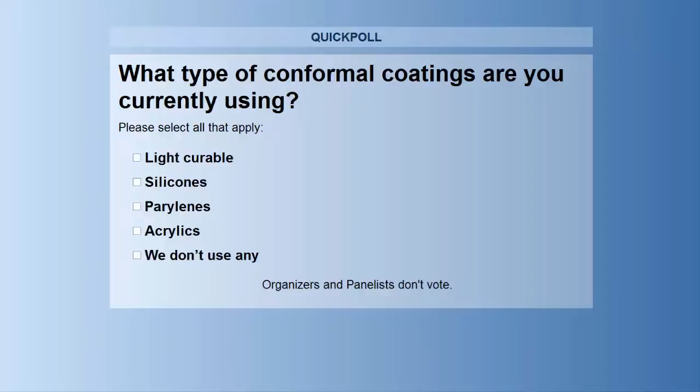All right, looks like 42% weighing in with light curable, 44% silicones, 25% parylenes, 53% acrylics, and 14% not currently using any. So certainly appreciate your weighing in on that. I know that this information will be very helpful to our presenters as they work through their presentations today. So thanks again for participating.

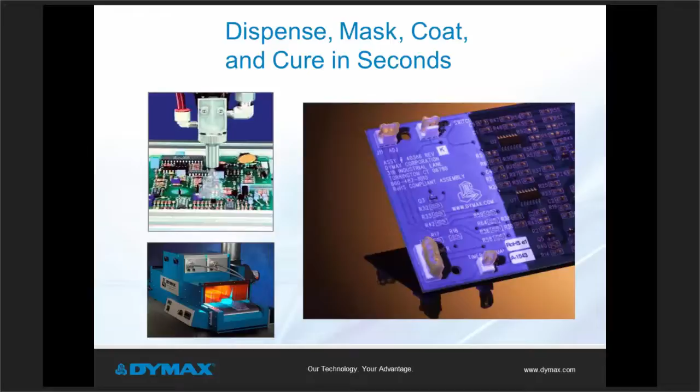Now, Chris, before we jump right in and start the discussion on UV light curable conformal coatings, perhaps we can take a step back and look at how UV technology works in general. Sure, absolutely, Laurie, thanks. And here, the typical UV curing process focuses on the 315 to 405 nanometer light spectrum. At times, even the visible light spectrum. Proper light curable material compatibility at wavelength, along with the proper curing intensity, are essential components of the curing process. And this is an important fact, actually.

Here's a slide showing a sectioned pyramid. UV light curable materials are typically made up of the basic components that pretty much stack up as you see on the slide. First is the oligomer on the bottom, which gives the basic properties such as chemical resistance or heat resistance. The monomer is used to add specific properties, things like elongation, flexibility, increased adhesion, lower shrinkage, that type of thing. The additive is the fine-tuning, for color, fluorescence, or surface tackiness. And then the photoinitiator package you see on the top in blue there enables the material to cure. All of these become the formulation for the light curable material.

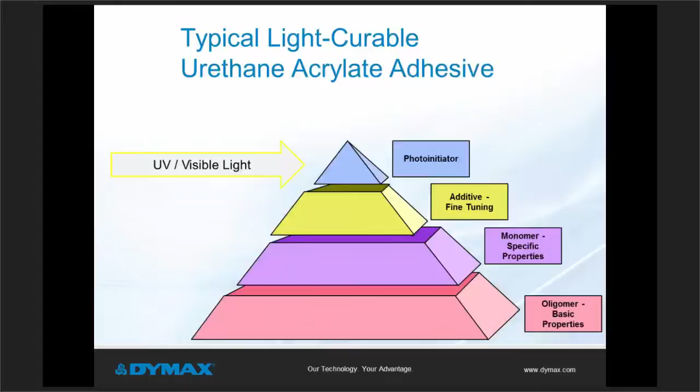That said, as I noted earlier, you need the proper energy to initiate the curing process. This slide shows the absorption curve for photoinitiators. The photoinitiator package is designed around the spectral output of the curing equipment, which varies. This slide, you see the peak at around 385 nanometer wavelength, aligning with the photoinitiator package of the material. As we talked about in the pyramid, formulations are designed with a specific type of curing mechanism in mind.

For example, a broad spectrum curing unit has a spectral output from 315 to just over 400 nanometers into the visible range. The photoinitiator package will be optimized to match the same range. In comparison, for LED curing, the wavelength is very narrow or specific, like 385 nanometers. So optimizing a formulation for LED curing means that the photoinitiator package needs to match the same wavelength in order to initiate and complete the curing process.

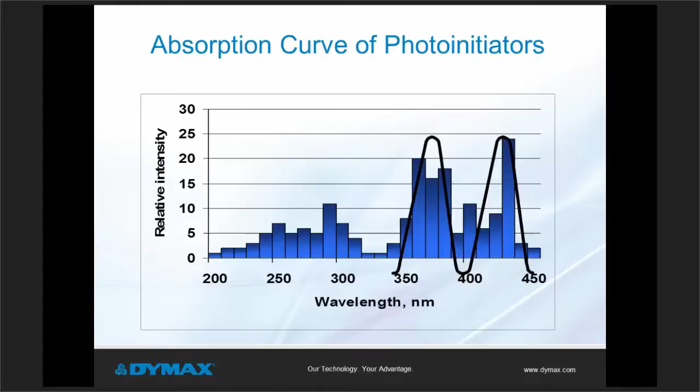So here's an illustration to show what actually is happening. Each quadrant is labeled 1 through 4, as you can see. In box 1, the light curable material is in an unreacted state. In box 2, the curing process is beginning. This is when the photoinitiator in the material is exposed to the energy source of the proper spectral output. It excites and fragments photoinitiators and results in generation of free radicals.

In box 3, in the lower left, the free radicals actually begin to attach themselves to the acrylates that make up the light curable material. This results in polymeric chain radicals. The process is repeated until all the radicals are attached, and there's polymer termination, which is basically cured material, and that's what you see in box 4.

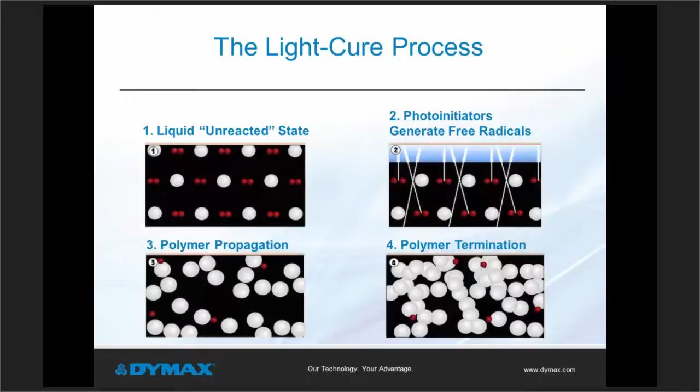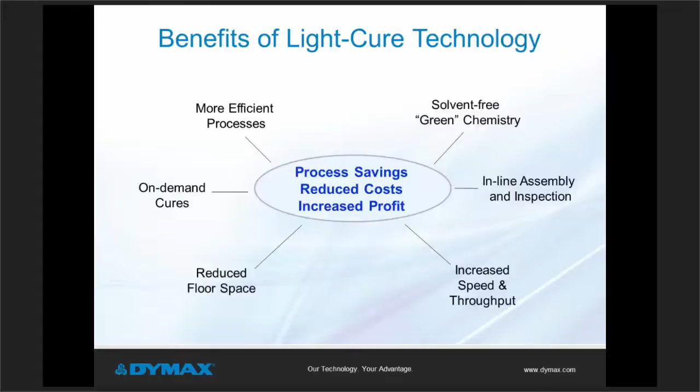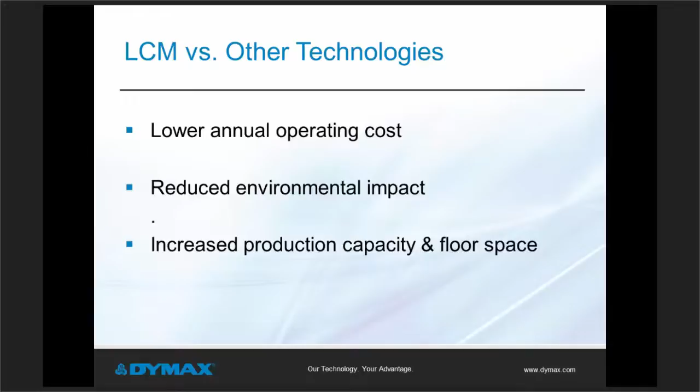Now, in terms of benefits, can you share with us some of the benefits of light cure technology? Yes, Laurie, I will, because the incorporation of light curable materials can really provide significant benefits over conventional solvated materials. Barry Richie actually is going to share a few customer experiences with everyone in a few minutes. Light curable materials offer advantages over other technologies in a few specific ways, and these can include lower operating costs. This is from low labor needs and low energy demand, combined with high throughput. They offer 100% solids materials or solvent-free products, and they can also increase production capacity due to fast cure times and small production footprint.

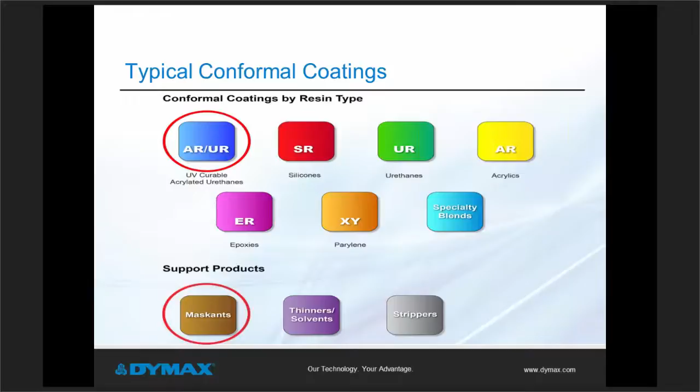Just as a quick note, which is probably very obvious to most of us, conformal coatings are thin, protective polymeric coatings, most often used to provide environmental protection without adding excessive cost or weight. Typically, they're applied at 50 to 200 microns thick, and they conform to the board, allowing for the protection and coverage, ultimately extending the life of the printed circuit board. They can be applied in a variety of ways, including dipping, brushing, spraying, flow coating, etc. Yet the most common application method for light curing materials is spraying. The coating can be applied over the complete board or more efficiently in a selective conformal coating process, that is, putting the coating only where you need it.

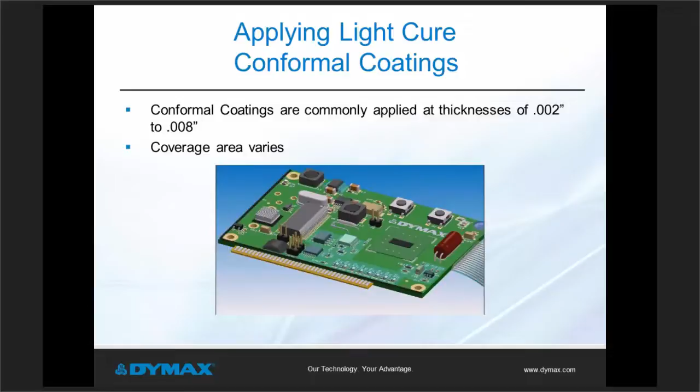Let's talk briefly about shadow areas and what is a shadow area. A shadow area is the area beneath components where a conformal coating may flow, and relative to light curing, it may not be exposed to the curing light from above. So if this is the case, it's important to have a secondary curing mechanism.

This is often heat or a secondary moisture cure, which is really gaining in popularity because it can cure in these shadow areas using just available ambient moisture. Both secondary heat and secondary moisture cure can eliminate concerns about uncured material on the printed circuit board.

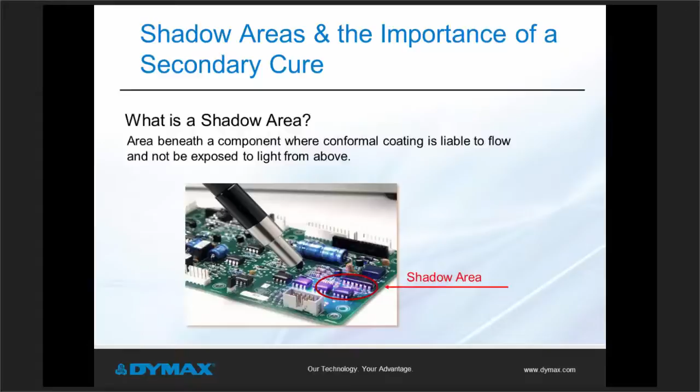Once the coating is applied, typically by spray dispensing, as we noted earlier, curing depends on the shape and complexity of the board as well as the thickness of the conformal coating. UV cure typically happens very fast and happens in seconds. This is unlike solvated chemistries, which take time to flash off solvents. The secondary cure depends on the cure type. However, with the tack-free UV cure, the secondary curing can happen while the boards are undergoing further processing.

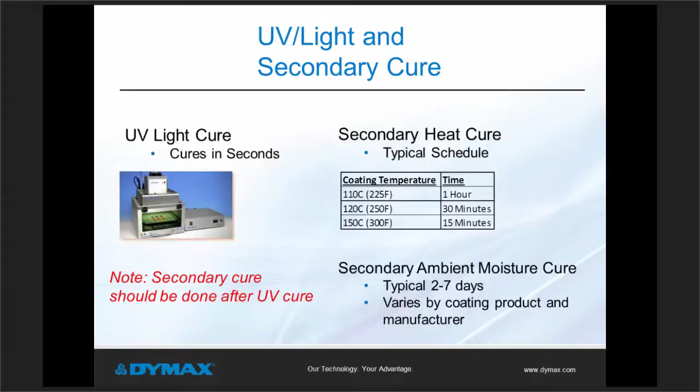So, in particular, comparing UV light curable materials with a secondary moisture cure to other chemistries, there are a lot of advantages that can lead to increasing process efficiencies. The actual advantages do depend on the particular material offered by each of the coating manufacturers, yet currently commercial materials can offer things like immediate tack-free curing in seconds, fast curing under ambient conditions, and this can happen in as little as 2 or 3 days,

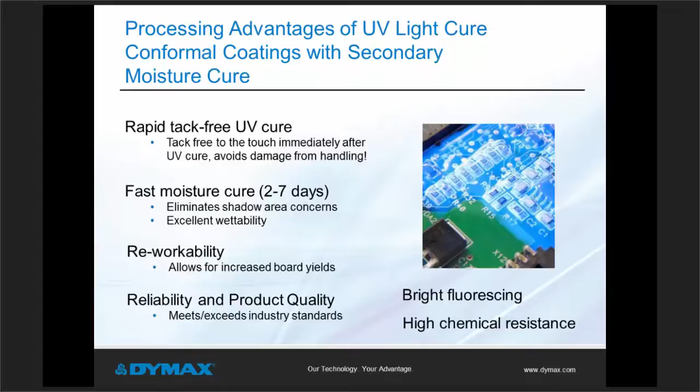reworkability, and this is a particular value for expensive printed circuit boards, and the lack of board or component damage from excessive heat or temperature processing, and this tends to be a big one. It's also common for light curable materials to fluoresce a bright red or blue to help with board inspection.

With respect to performance, light curable conformal coatings are also robust enough to meet very demanding application requirements and also meet existing conformal coating performance standards. Probably at least most of the audience is somewhat familiar with those listed here.

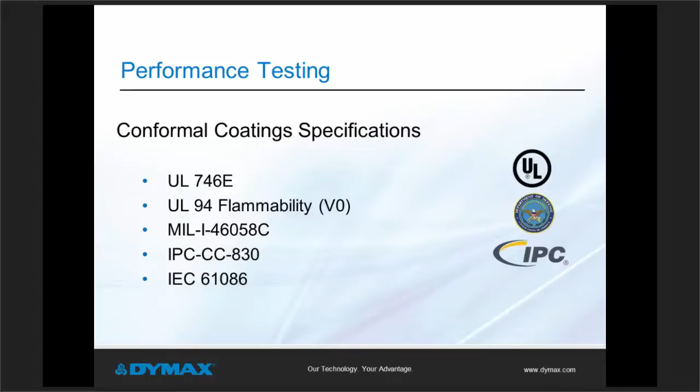And finally, when it comes to performance and testing, there are a series of other common tests against which light curable materials have performed well, particularly compared to competing technologies. Tests such as flexibility, thermal shock and thermal cycling, temperature and humidity testing, as well as corrosion testing using salt spray or salt fog, as some reference it, and sublimated sulfur. These are at least some of the common requirements you'll see.

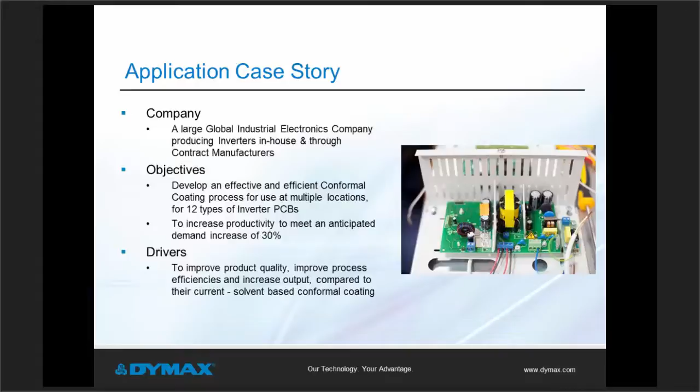To meet current production rate demands, their system would need to be tuned with a 25 micron maximum dry coating thickness based on the solvent-based coating and process, yet at this thickness they could not meet the existing electrical requirements of their global customers. Air pollution and odor due to solvent evaporation was a serious problem in these factories as well, even after extensive ventilation system upgrades were performed. This was evident on the production line as well with work in process and inventory and storage. Add to these issues the requirement to increase production efficiencies to meet planned demand increases, yet in the same floor space at a comparable or lower cost.

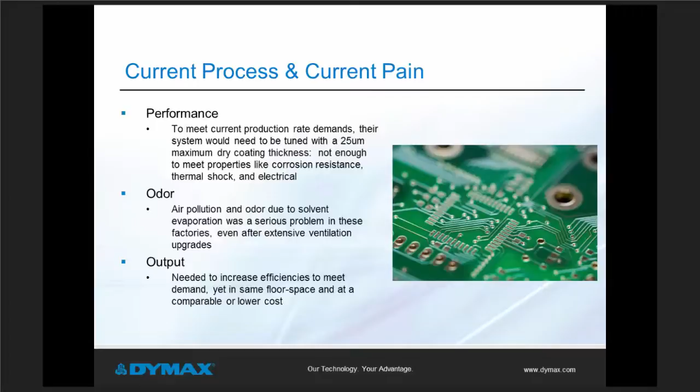So it sounds like they had some significant challenges they're up against, so could you share with us how they solved their dilemma? Certainly, Lori. They did it by the integration of a light curable material chemistry and process. First, they selected 2 different UV curable materials that met their customer specifications and also had a secondary moisture curing component. The materials were tack-free after UV curing and fluoresced a bright blue to improve process inspection.

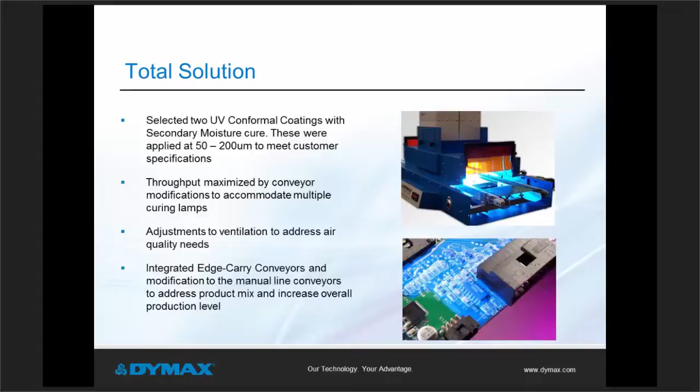They then optimized their conveyors, their curing lamp positioning and curing area, made adjustments to optimize the impact of ventilation in addition to the lessened problems due to their move away from solvents. And they adapted their manual lines with similar light curing material line configurations to quickly handle product through the process of a broad-based product mix. And so let's take a look at some of the results that they experienced.

Well, as a result of these improvements, both in product chemistry and product process efficiency, their performance objectives were met. They provided PCBs to the critical performance standards of their inverters. They reduced the odors, which improved worker satisfaction and safety. They increased output within the same physical footprint and ultimately met the cost targets necessary to meet the market demand and profitability requirements of their organization. All around, a successful implementation using the benefits of the most optimized solution measured against their goals.

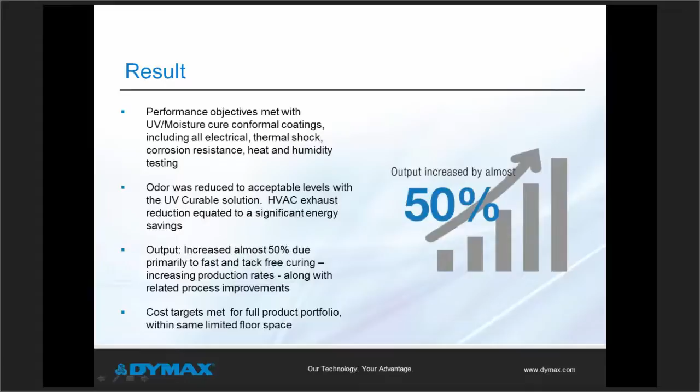And at this point, I'm going to be passing the mic over to Virginia Hogan. First, some words in the way of an introduction. Virginia Hogan is Global Product Manager for Dymax Corporation, which includes support of the aerospace, automotive, energy, consumer electronics devices, and orthopedic implant industries. Virginia has over 13 years of experience with UV curable adhesives and 20 years of experience in the aerospace industry. Her efforts are focused on product line development to meet market and customers' needs with the next generation masking and gasketing products.

Ginny, pleasure to have you here with us today. How are you? I'm very fine, Lori. Thank you.

All right, folks, Ginny will be discussing light curing maskants, but before we get to that, we have for you one more interactive poll. So folks, coming up on your screen, you should see a poll, and we'd like to hear from you. What type of mask are you currently using on your PCB? Is it tape, caps, latex-based, light curable, or perhaps other? Okay, it looks like 59% of our audience saying tape, 32% caps, 41% latex-based, 44% light curable, and 3% saying other.

Ginny, any thoughts on these responses? Well, I'm pleased to see the diverse use of maskants, and it gives us a great basis to start with to talk about the benefits of light curable maskants. So Lori, thanks for sharing those results.

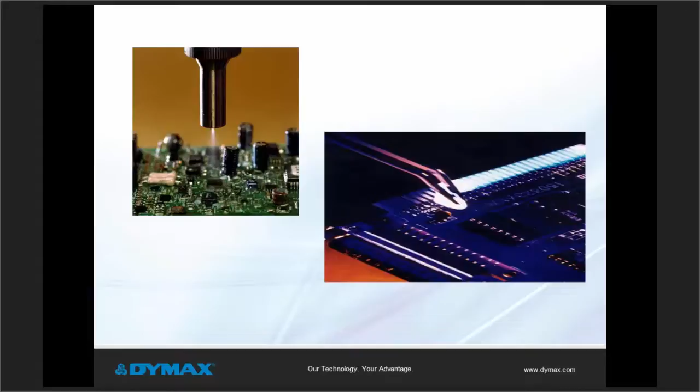As Chris mentioned earlier, when the printed circuit board is designed, there are areas designated to be free of coatings, which could include pin connectors, through holes, and zones on the board itself. Maskants are used to protect these keep-out areas during the conformal coating process. Just as we learned there are different types of conformal coatings, there are different masking options for the protection of the connectors and the board keep-out zones.

First, let's talk about tapes. As we saw in the results, many of you are currently using tapes. Tapes and dots are a very common method, which do not require a curing step, but they are a very labor-intensive application, especially on highly populated boards where there's very little space between the connector to be able to achieve a good seal against the board. Tapes also bring some challenges of removing the residue left after the coating has been applied and heat cured. This could be the root cause in not passing the SIR testing on the boards.

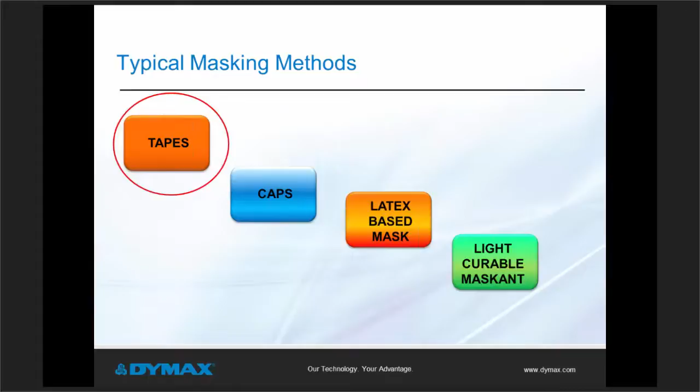Caps are another common masking option. There are standard caps available which may or may not fit your connectors. Custom caps may be required to accommodate the exact height and shape of your connectors. Caps are not effective for through holes or on the board level areas. Caps have a limited use as they lose shape and sealing after multiple uses, causing rework of the conformal coating.

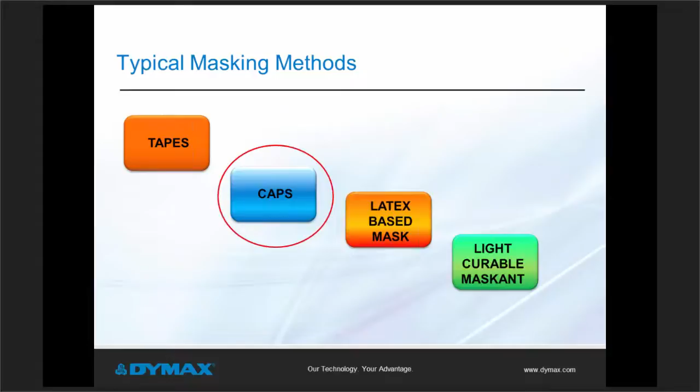Latex-based maskants are yet another option for protecting your connectors and the board surfaces. Latex-based maskants are 50% solids, so you'll need to flash off the solvent or heat cure the water or air dry the maskant. The curing times range from 15 minutes for heat up to 8 hours if you're air drying the maskant. Depending on the viscosity of the maskant, multiple applications and multiple cure cycles are required to achieve the full protection coverage. Some of the latex-based maskants have an ammonia content, and that may cause discoloration or corrosion of the pins.

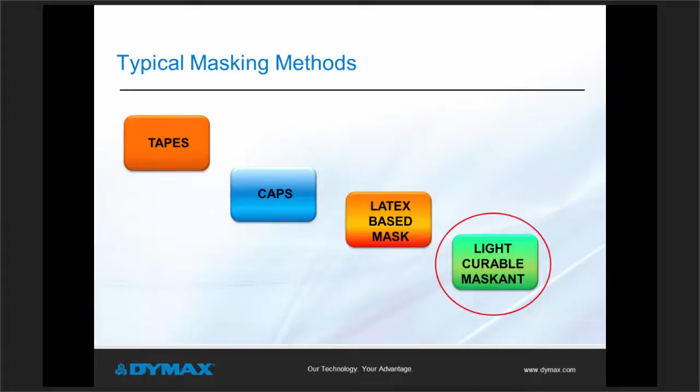Now I'd like to introduce you to the light curable maskants for printed circuit board connection protection. How do light-curable maskants help improve the productivity of your conformal coating process? Before I can answer that question, let me introduce you to the light-curable maskants. I want to share with you some of the key differences of light-curable maskants to conventional masking options that we just explored. First, the maskants conform to simple configurations such as a through hole or complex connectors with formulations that are not slumping and will not migrate off of the connectors onto the board. These formulations are compatible with copper and gold pins, eliminating the concern of corrosion or discoloration.

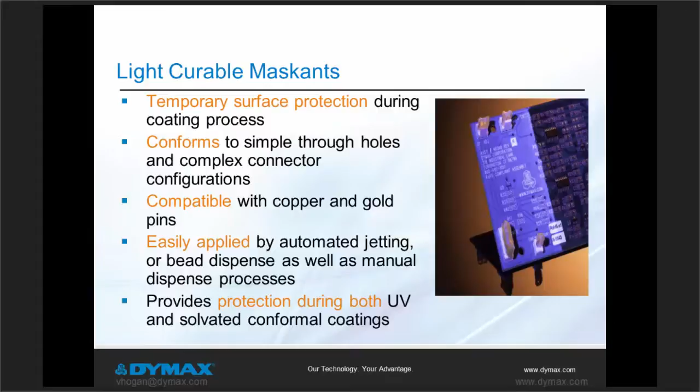Application of the maskants can be done by a manual dispense process, or for more precision applications, you could select an automated process such as jetting, or a multi-axis valve system could also be used. These formulations are developed to be a manufacturing aid with either UV conformal coatings or solvated conformal coatings. Unlike the latex-based maskants, light-curable maskants cure on demand in seconds rather than hours, which means the boards are readily available for your conformal coating process. There is no need to rack your boards to wait for the maskant to cure.

The light-curable resins are applied to the necessary thickness with one layer of coverage with one cure cycle. Additionally, these resins are formulated with fluorescing agents for inline placement inspection, just as Chris had mentioned about the conformal coatings. When properly cured, the resins can easily be removed in one piece after the conformal coatings are tack-free.

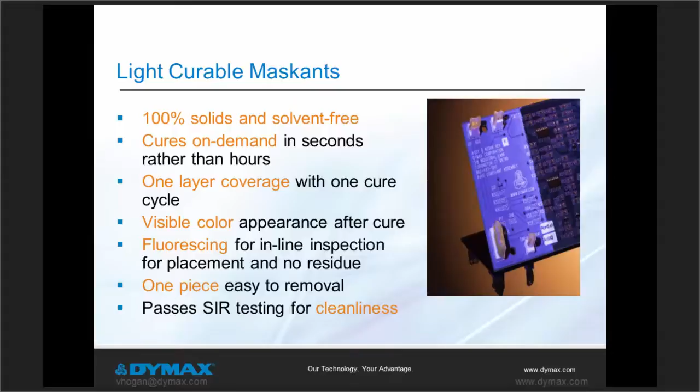So, Ginny, what are some of the benefits for the manufacturers? Lori, some of the benefits are just a result of the characteristics that we just talked about, with the on-demand cure, with being 100% solids. These all contribute to the total operating cost of the masking application, combined with the reduction in scrap and rework because of the reliability of these maskants.

Light-curable maskant resins are 100% solids and solvent-free, reducing the environmental impact. Many available latex-based maskants are solvated or have an ammonia base that is harmful to the environment. Light-curable maskants are a greener option.

The time required to process light-curable maskants is significantly shorter than solvated or heat-cure masking resins. Time savings allow for increased throughput and reduced lead time to your customer. The zero keep-out violations prevent rework of the conformal coating and contribute to the increased throughput.

Light curing equipment has a smaller footprint than production heat curing ovens, which frees up floor space. The shorter cure cycles and having boards immediately available for your conformal coating process increase your productivity. These resins are tack-free upon cure.

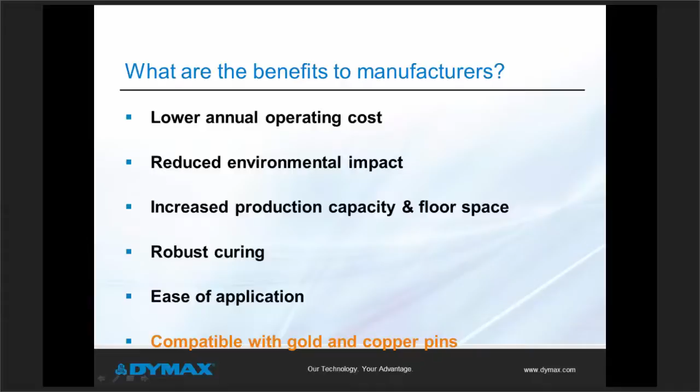Thank you, Ginny. As Ginny alluded to, the masking and demasking operations involved with conformal coating are probably the most aggravating and time-consuming bottleneck in the entire process. I would like to review light curing masking solutions for increasing process efficiencies using an actual case story as an example. Thanks, Lori.

A large global industrial electronics company designs and manufactures PCB assemblies for network communications, industrial, aerospace, and medical customers. This company was faced with increased production demands and rising costs from rework. They sought out an alternative to their current latex-based masking process. Their objective was to develop an effective and efficient masking process for incorporation at their multiple assembly locations.

This solution was to support an anticipated demand increase of 30%. Additionally, this solution had to improve product quality, improve process efficiencies, and increase output compared to their current masking processes.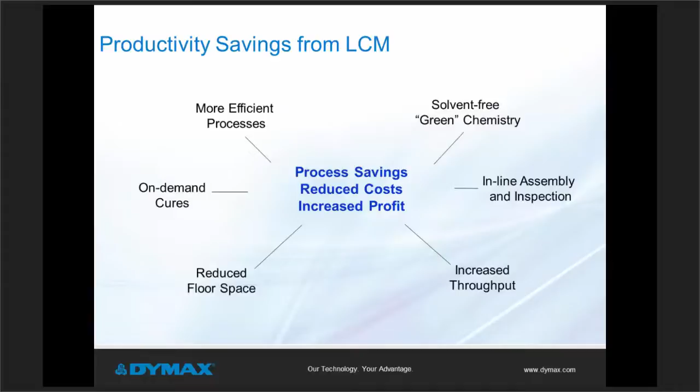Back to you, Laura. All right. Thank you so much, Ginny.

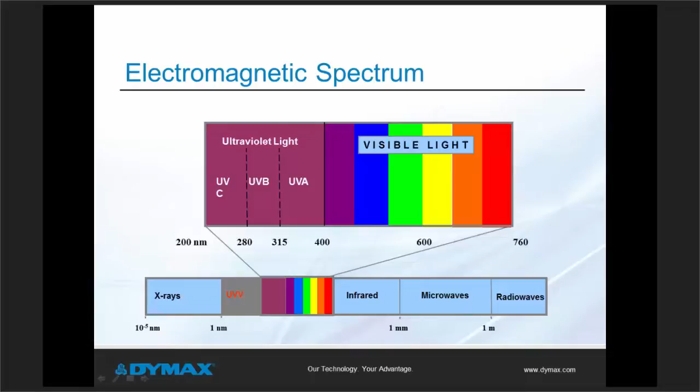A black light does not fall within that range, so consequently the black light is not going to give you the proper intensity at the right wavelength that we need to be able to cure these light curable materials, whether it's the masking or the conformal coating. All right. Well, thank you so much for that. Let me forward our deck back to the end, and we'll get to our second question.

Over to you, Chris. And that question is, you mentioned that UV curable conformal coatings are typically applied as thin coatings. Can you coat thicker, for example, 0.010 inches or more in a single pass? Thanks, Lori. Yes, you actually can. It depends on the board configuration. It depends on the conformal coat itself. But the key here is applying the material and still meeting the requirements you have.

So very thin conformal coatings, especially in light curables that are typically spray coated, it becomes more difficult for the coating to build up. But there are materials. I know at Dymax we have a 9482 material, which is basically designed to coat thicker, but you also, in coating thicker, would be able to maintain things like UL flammability. So you have to think about the performance requirements that you have in addition to the thickness that you're looking to apply the conformal coat. But the fundamental answer is yes, it can be done. You just have to select the correct material.

Okay, gonna go over to Barry. Question is, what is the maximum thickness recommended to ensure proper UV curing and eliminate outgassing under parylene? Parylene. Well, parylene is a gas deposited vapor that is done in a batch process under vacuum. Typically, parylene has a very high dielectric strength. In most circuit board applications, you're basically going to use 0.7 to 1 mil thickness, much thinner than the organic materials.